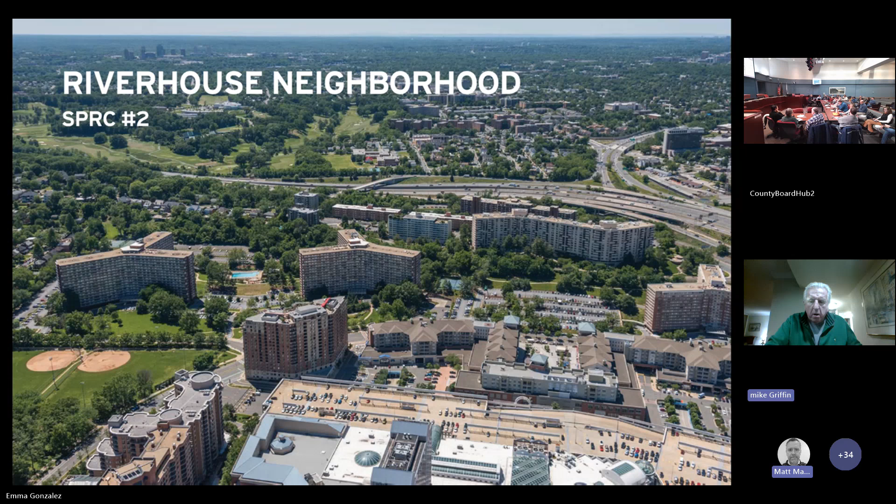Tonight, we're here to present our updated proposal for the RiverHouse neighborhood, which is really a culmination of several years of work, which many of you have been a part of. But I also want to remind folks that we're far from the finish line and there's still a lot of work to go. With that, to present our updated proposal, I'll hand it off to Allie Reed of Torti Gallas Partners.

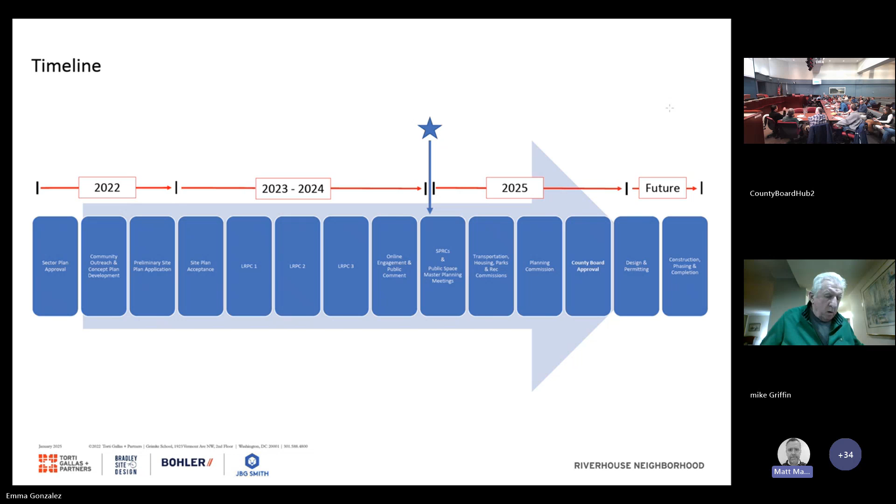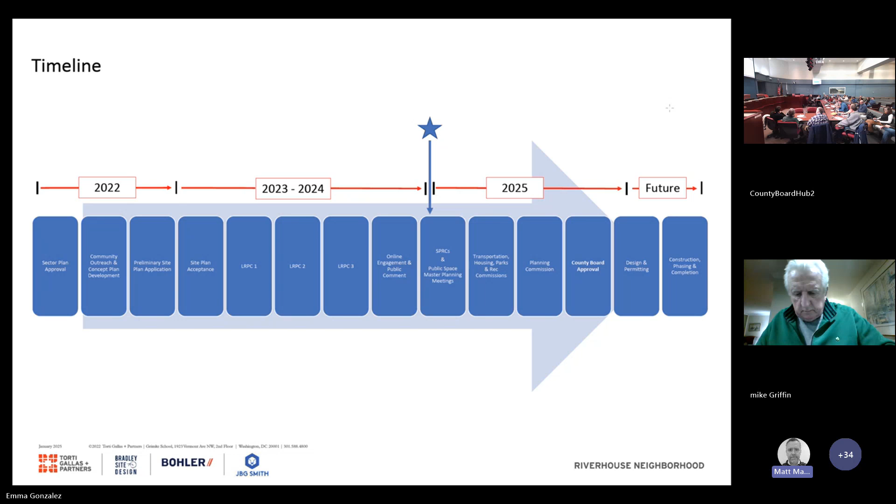Thanks, Gray. My name's Allie Reed, I'm an architect with Torti Gallas Partners.

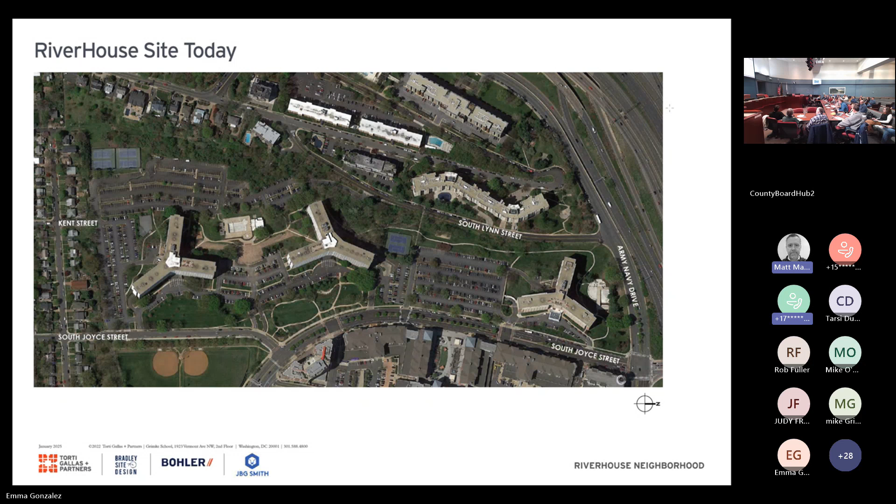So just to reorient us, the RiverHouse site today has the Ashley, the Potomac, and the James high-rise residential buildings. To the north of the site is Army Navy Drive, on the right side of your screen. On the left side to the south are the lower-height single-family neighborhoods. West Post is directly to the east at the bottom of your screen. We'd like to start today by taking a look back quickly at where we've been and what we've heard.

Back in 2023, the plan consisted of rental townhome fabric at the southern end of the site, mid-rise buildings C1, C2, and C3 in the central part of the neighborhood, mid-rise buildings N1 and N2, and to the far north, building F2, which is mid-rise, and building F3, which was high-rise. Between N1 and N2, a public open space directly across the road from the larger, more retail-centric Westpost Plaza, and of course, the green ribbon woven through the neighborhood at various scales.

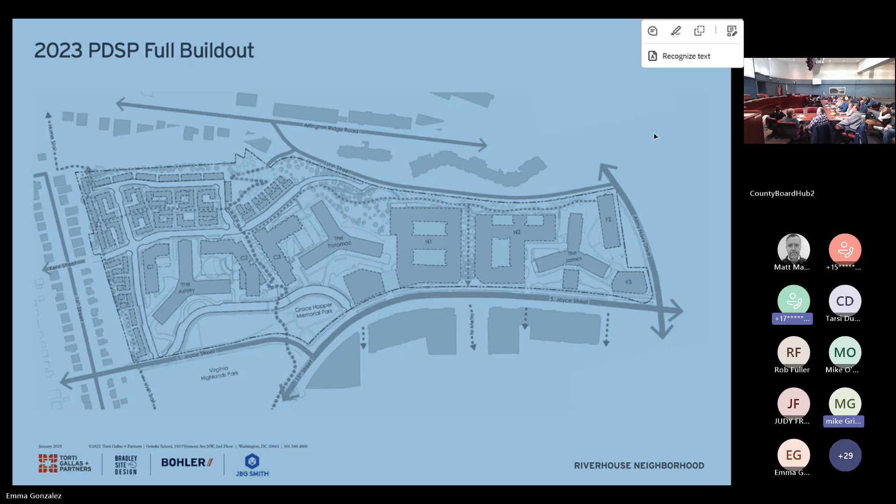Based on this plan, we received some feedback. I won't read through all of these because I'll go through them on the next slide, but big picture, changing building footprints and moving building footprints as well.

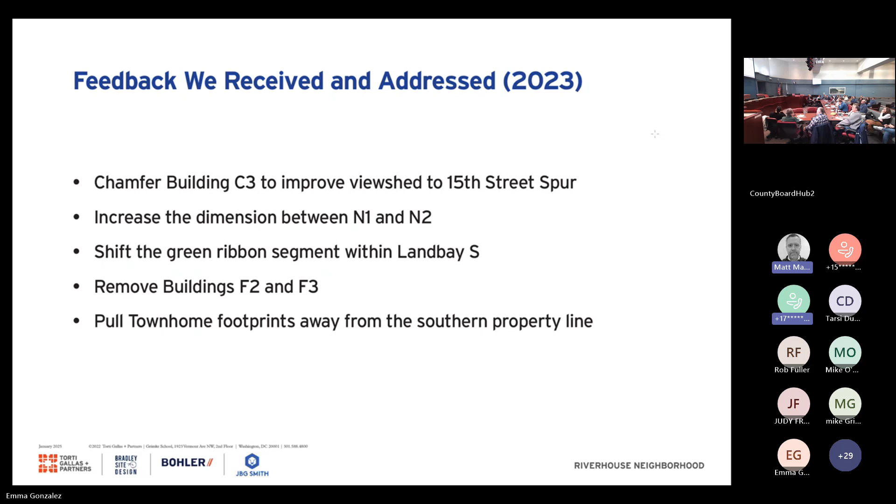So the team then worked with staff and made all of these changes. The plan evolved throughout 2024. We chamfered building C3 in order to improve the desired view shed between Virginia Highlands Park and the 15th Street spur, shifted the green ribbon segment within Landbay S east, and pulled all of the townhome footprints further away from the southern property line. We increased the distance between buildings N1 and N2 to 97 feet and removed all of the far north buildings. As part of this version, the rental townhomes were also changed to be for-sale townhomes, and with that change, a condo building was also incorporated. That's building O on this plan.

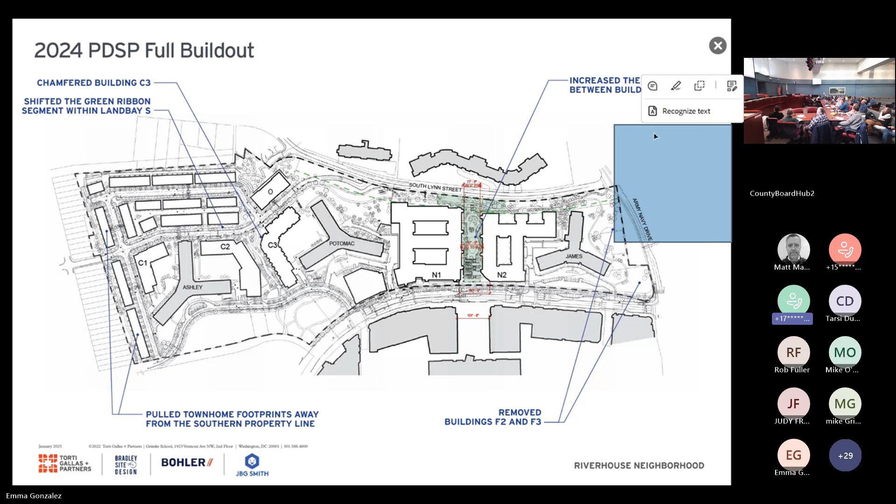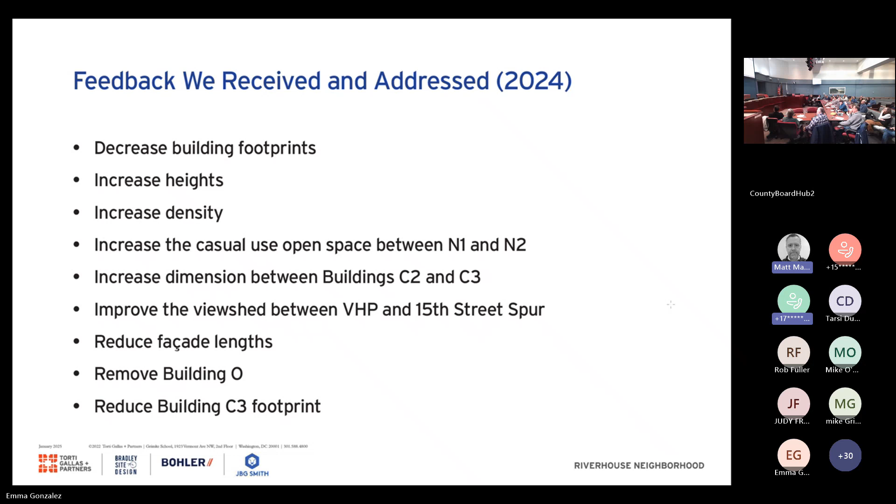At this stage, we received some more feedback. The larger points of that: decreasing building footprints, increasing heights and density. Again, I won't go through all of these, but we'll touch on them on the next slide.

This brings us to today. This is the currently proposed PDSP that the team is planning to submit. On the southern portion of the site, we have significantly opened up that view shed between Virginia Highlands Park and the 15th Street spur. The building O, that condo building, has been removed from the application. Building C3's footprint has been reduced significantly, and the distance between building C2 and C3 has been increased as well.

In adjusting that C3 footprint and removing the O building, the team was able to reevaluate the alignment of Kent Street. You can see that between the C2 building and the townhome footprints in this plan. This plan represents a slight realignment there, which allows us to preserve some of the existing RiverHouse amenities for RiverHouse residents in the interim condition. We'll see that in a phasing plan later in the presentation.

To the north, we also reduced the footprint of building N2, increasing the heights to 22 stories on the Joyce Street side and 12 stories on the Lynn Street side, allowing for a plaza or public open space that roughly matches the width of Westpost Plaza across the street. We also incorporated building N3, new to this proposal, a 22-story residential tower. For building N1, we actually removed the entire southeast wing of that building, overall reducing the size of that building and reducing facade lengths on Joyce Street.

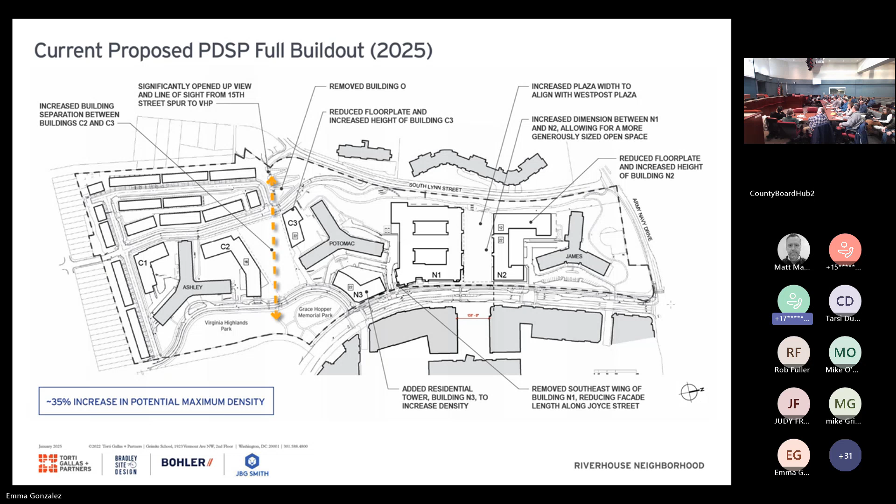This is the massing of the prior proposal, the 2024 version we saw a few slides ago. You can see the townhome footprints on the left of the screen creating that low-rise fabric on the southern end of the site, the mid-rise residential and mixed-use buildings filling out the rest of the neighborhood, as well as the green ribbon woven throughout.

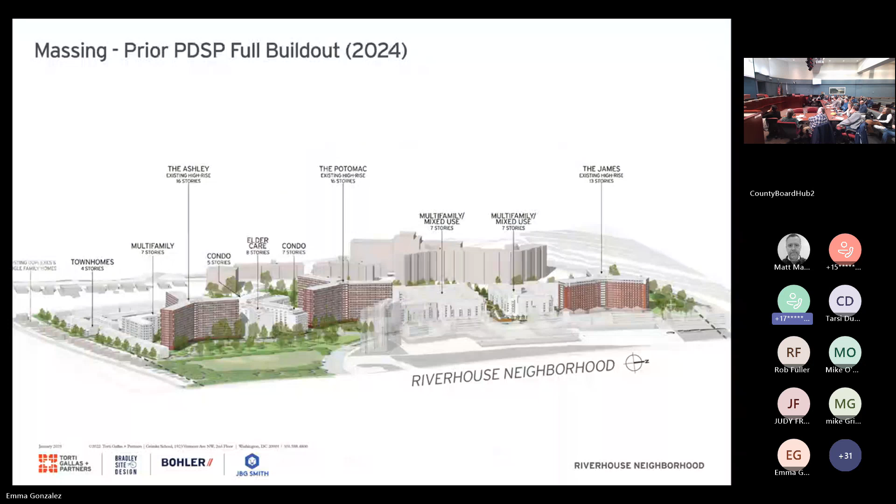In comparison, today's proposal actually includes greater space between buildings, so a larger building separation distance, generally smaller footprints, and increased density.

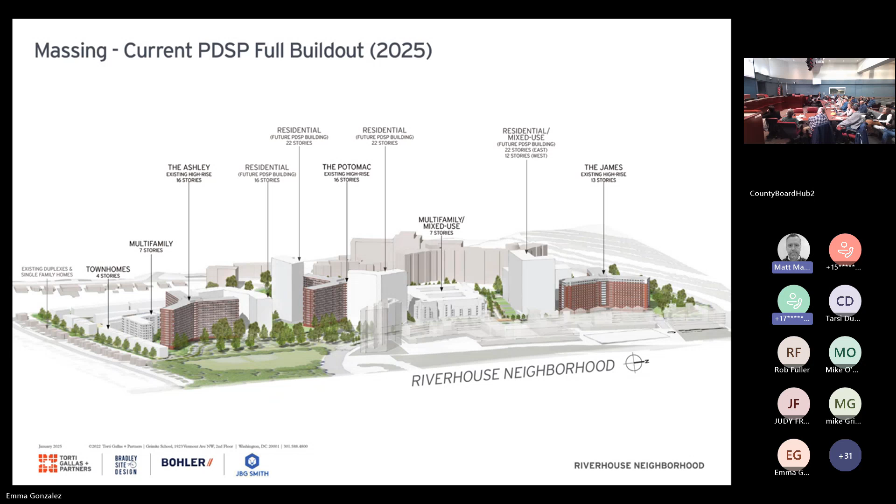With that, I'll hand it over to Belle with Bradley Site Design.

All right, thanks, Allie. I'm Belle St. John Day with Bradley Site Design, landscape architect for the project.

Much like Allie was describing the revisions the design team has made to the building massing, we've also been reviewing the green ribbon connections throughout the RiverHouse site to ensure we're creating a connected site throughout RiverHouse and into the larger community. So when we go to the next slide, this is the proposed full build out of the green ribbon on the site, with the remainder much the same as the last SPRC that everyone saw. The biggest revision is coming to that primary green ribbon from the 15th Street spur connecting to Virginia Highlands Park.

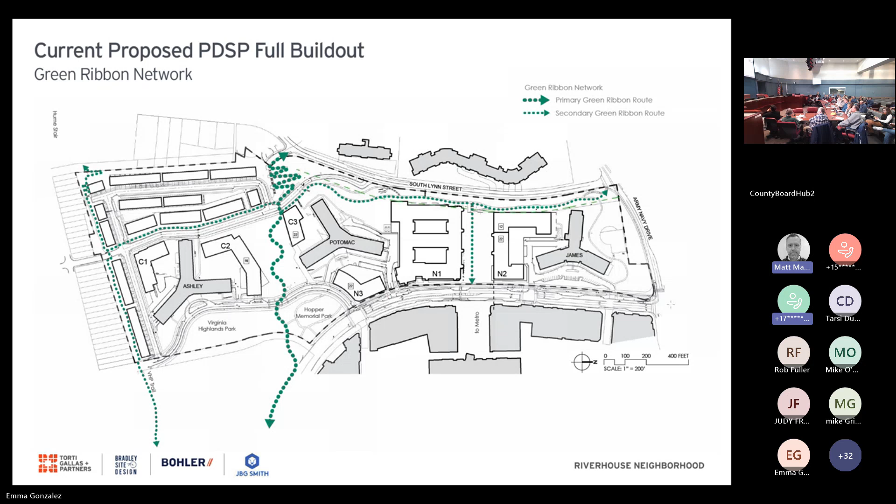So on the next slide, we zoom into that area, and what we heard an emphasis on was the line of sight from that prospect at the base of the 15th Street spur, between the Ashley and the Potomac, facing Virginia Highlands Park. We've highlighted that in yellow.

And then you can see we've placed that primary green ribbon within that view shed, understanding we still have 52 feet plus of elevation we have to navigate with this green ribbon. We want to be clear this won't be a straight shot to 15th Street spur.

It'll have to be a meandering, biophilic experience as laid out in the sector plan. Along with that, at the crossing of the primary green ribbon at Kent Street, with the realignment of Kent Street, we've been able to raise the elevation where we were most constrained, making that topographic change between the Kent Street connection and the 15th Street spur. With that raise in elevation, we're able to splay more of those ADA pathways and allow more canopy and vegetation area within that space.

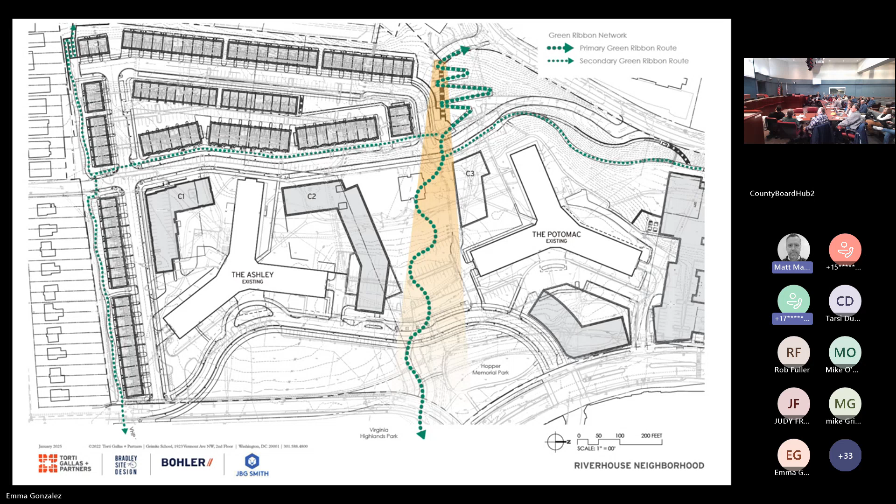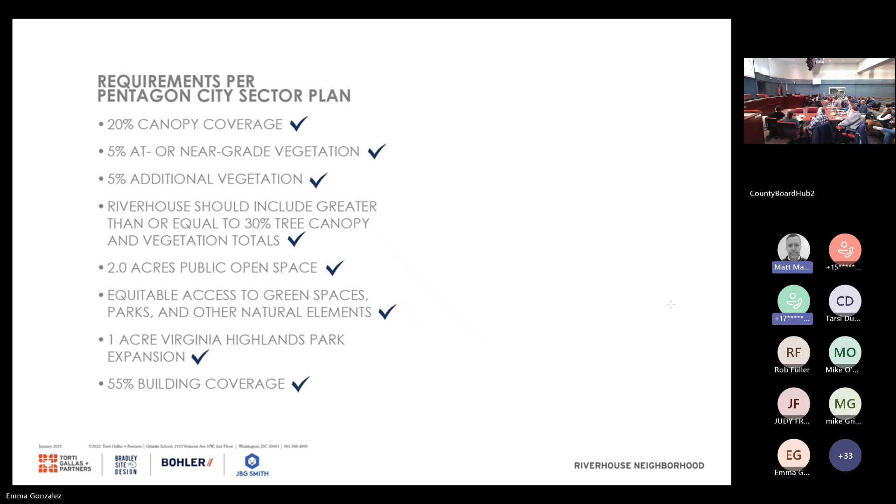That move of Kent Street allowed the shift of the C2 and C3 buildings. So the rest of the green ribbon, while it has to make up more grade change, we have more space to do so. The next slide emphasizes that with those shifts in the building and Kent Street alignment, we gain more space at the ground level to meet and exceed the vegetation requirement, especially the canopy coverage on the site.

So on the next slide, you'll see an overall plan of the site. Initially we had proposed final site plans for each element of the site in Land Bay S, Land Bay C, and Land Bay N, and we were going through a final design process for each of those buildings to be approved.

Now we are in a position where we are still going to get final site plans approved for the entirety of the site, but we are not going to be bringing forward all of the buildings within the PDSP at that final design level. So looking at this slide, you can see there are three areas that are not shaded: that's Land Bay S, building C1, and building N1.

These are the buildings that we plan to move forward with in the relative near term and to lock in the design for. So we're going to have final site plans with details for Land Bay S, building C1, and building N1. That leaves those shaded areas labeled existing, which encompass both the existing RiverHouse buildings and those future buildings that we do not see moving forward with in the short term, in the immediate term.

As we've said, there's a timing element here. Part of why we had these shorter buildings initially is we felt like those could be built in the short term. Now that has changed, and we can't necessarily do that with the proposed footprints, or build these in the short term. So we're not designing them to a final site plan level at this point.

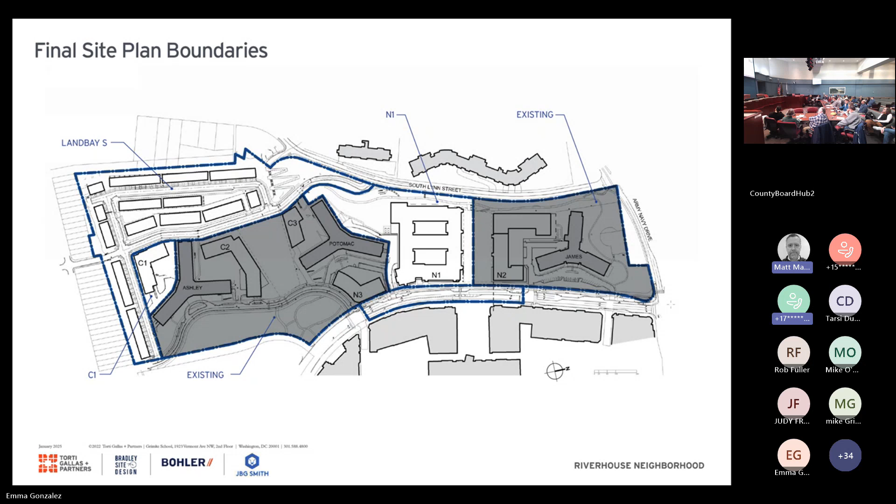So on the next slide, obviously, if we're moving forward with a portion of the site rather than the entirety of the site, we need to look at this in phases and how these different elements will be delivered and what will come with them. Land Bay S, C1, and N1 are the projects we see going forward in the relative short term, and Land Bay S is likely to go first.

We've shown here what's going to be provided along with these townhomes: we'll do the green ribbon in that section, Kent Street, and the affordable housing that goes along with it. We'll be submitting a final site plan with these details. That is not in yet, but it will be something this committee will review as we continue through this process. Obviously that also means there are going to be some interim conditions, and those are things we're going to have to discuss and talk through with this committee and with staff.

One of the important things to keep in mind with these interim conditions is that we have to make sure the existing RiverHouse buildings remain great places to live and that the amenities the residents use are still in play.

So one of the important elements of this interim condition is maintaining the location of the existing pool and fitness center. Those will ultimately be relocated in the final condition, but not in this short-term interim condition.

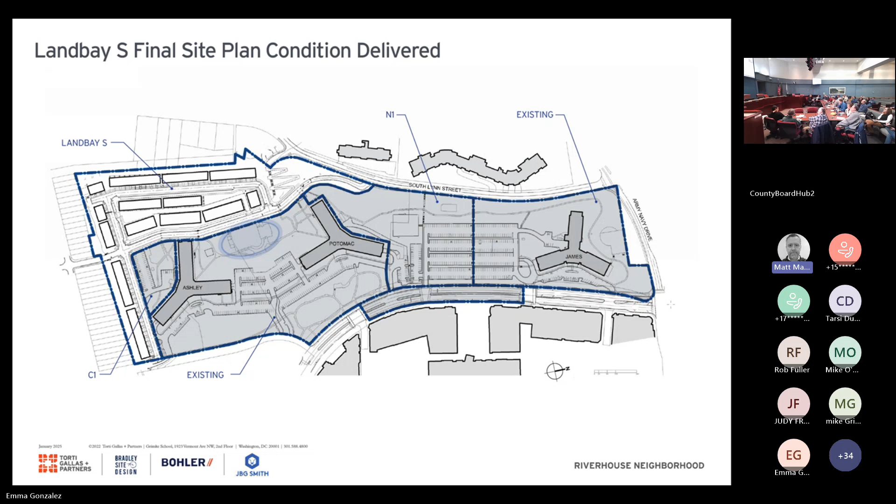The relevant portions of the green ribbon will be provided, as well as the accompanying roadway improvements along Joyce Street. There is also the portion of the open space adjacent to N1 up to the parking lot that's existing today, and we will provide those interim conditions as well.

Just to remind you, those areas that are shaded and labeled as existing will encompass the existing RiverHouse buildings and the future buildings for which there will need to be future final site plans.

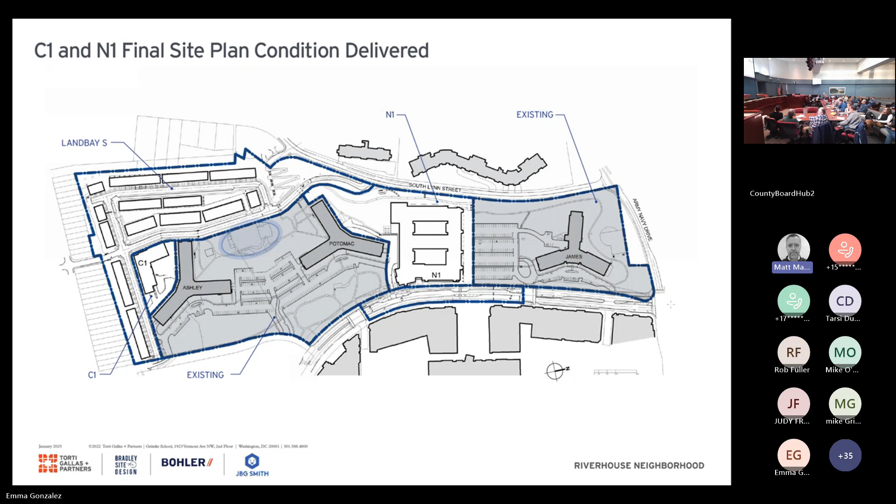On the next slide you can see the massing of what we anticipate that short-term build out to look like. Again, Land Bay S, C1, and N1 are the only buildings for which we are coming forward with specific final site plan designs at this point.

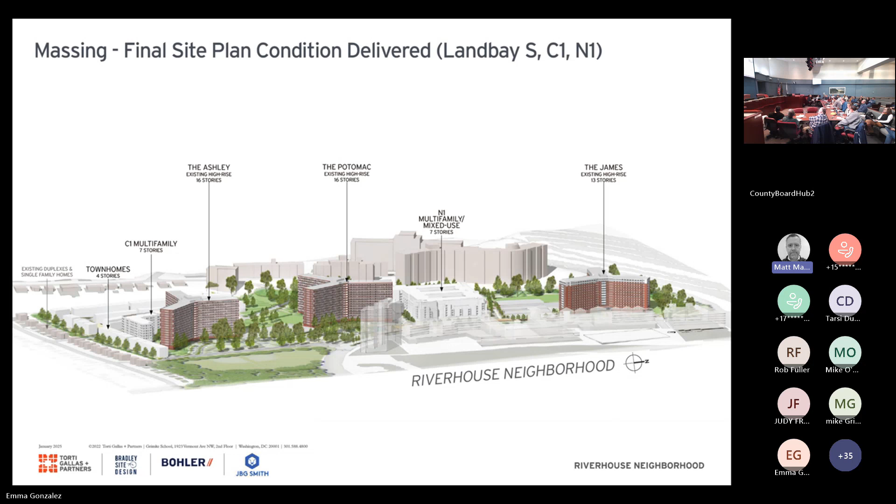So to summarize on the next slide, going over the things that Allie and Bell spoke about, what we have addressed and revised, both from the 2023 PDSP and LRPC discussion, and the 2024 final site plan discussion, that brings us to where we are today.

With that, I'll close and we'll be available to answer any questions you may have. Thank you. Mr. Watson.

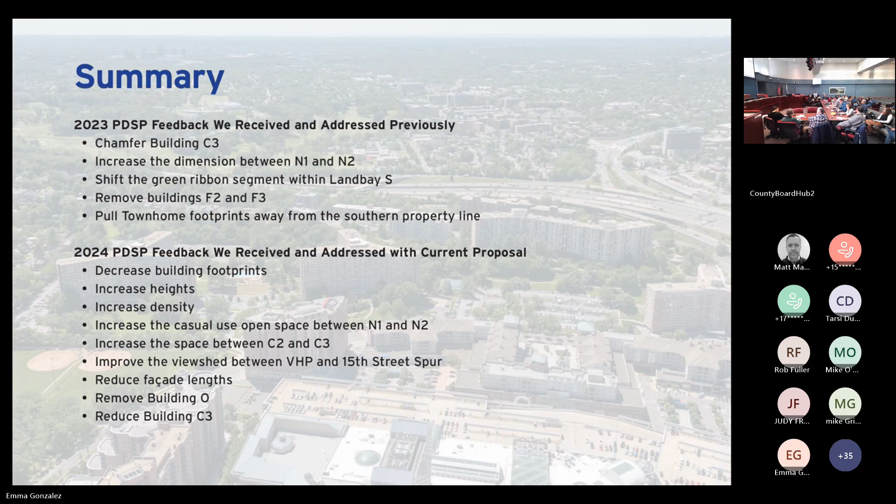Okay, thank you. Good evening, everybody. My name is Adam Watson with Arlington County Planning Division.

As the applicant just walked through, they made some pretty significant changes to this project in response to comments they got from the SPRC, from staff, and from the community. I just wanted to go over a couple of discussion objectives for us this evening for those on the committee here at the table.

The revisions we have are obviously at a conceptual level of detail only. We don't have a formal 4.1 plan submission yet. So the purpose of this meeting is really to focus on those conceptual changes, high level general changes, so the applicant can hear what everybody has to say before they formally resubmit those 4.1 plans to the county.

I think there are 4 areas in particular that we would hope to focus in on tonight, where the most changes were made: the density, the building placement and building heights, the public space sizes, shapes and locations, including the green ribbon, and then anybody's initial thoughts or questions about phasing and what each building might bring in terms of infrastructure and community benefits.

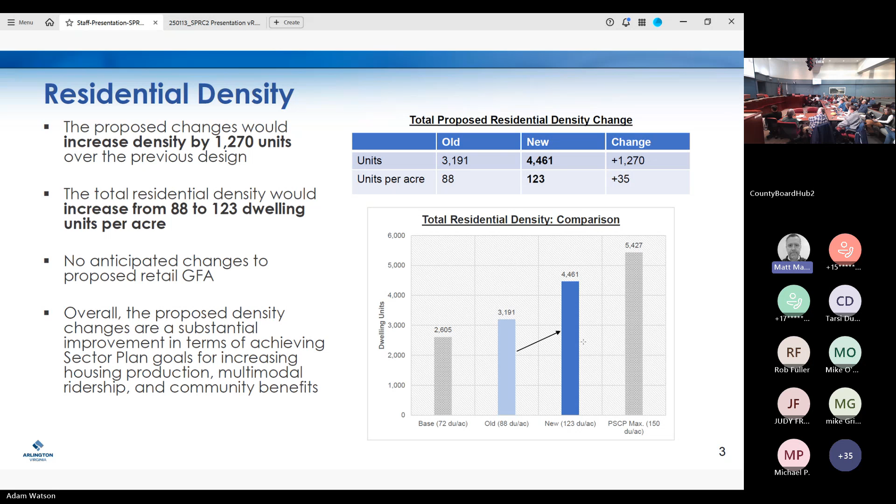From the county's perspective, this is a positive thing. The sector plan sets forth goals for having building height variation and for having taller buildings in specific locations, allowing for narrower footprints that enable larger and more generous public spaces. The issue we were running into last time was that the width of some of these building footprints was obstructing or diminishing what would otherwise be public open space.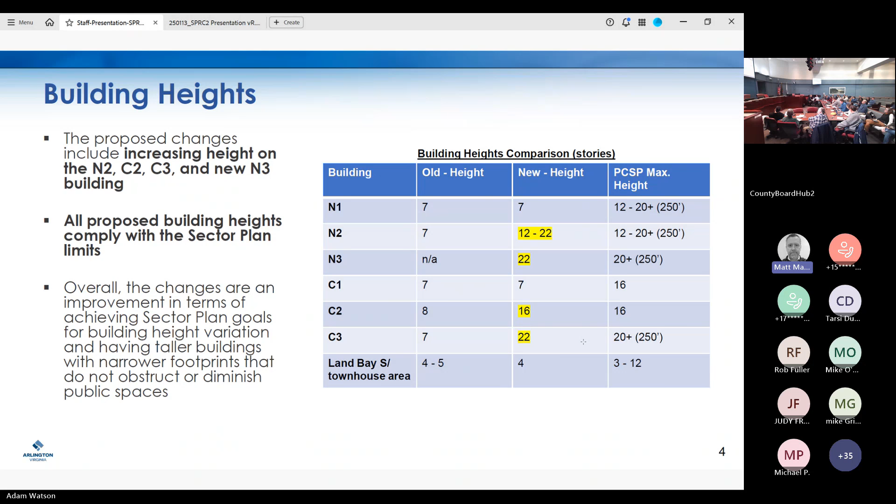I'm going to walk through a couple of those spaces quickly now. This is probably hard to read for those in the room, so I can come back to this later if there are questions, but we're going to do a comparison of old versus new. I'll work from the north side of the site down to the south, so page right to page left, starting with the northern area.

The first major improvement is that you now have the N1 and N2 building corners on Joyce Street meeting those fixed build-to lines shown in the sector plan, which means you have a width of this future public space that mirrors West Post Plaza across the street. In addition, this space will now be a full acre public space.

That does not include counting into any of the green ribbon or forested area that's up against the western lot line of the site or up towards the north, which was again an issue that we raised previously.

Again, building heights on the N2 building would increase here. There's not a final site plan for this building to come forward in the near term, but in the future you'd have a sort of L-shaped 12-story wing, then stepping up to 22 stories as you move towards Joyce Street.

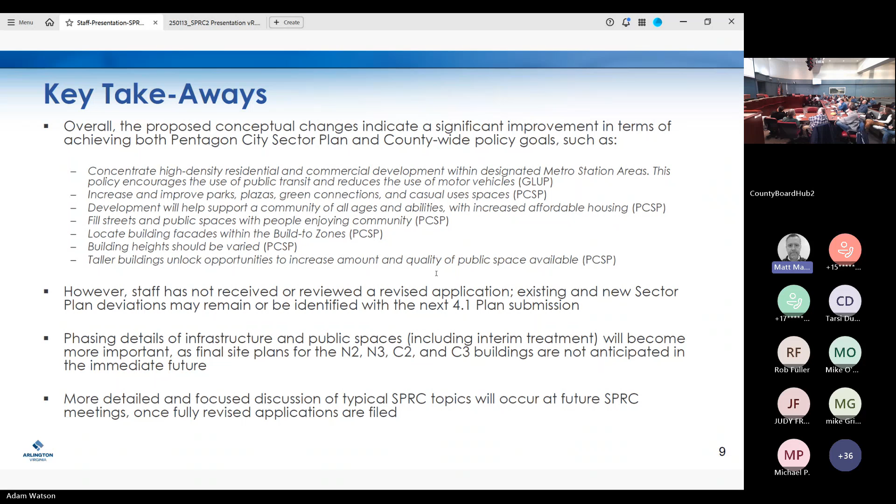That being said, we want to caveat one more time at closing that we don't have an application on file yet, so there may be new or existing deviations that we'll cover at future SPRC meetings.

We note, as Kedrick mentioned towards the end of the presentation, that phasing will become perhaps a more important topic of discussion for the SPRC, as we'll need to look through how infrastructure and public spaces are going to be delivered, not only in the final condition, but also with interim treatment.

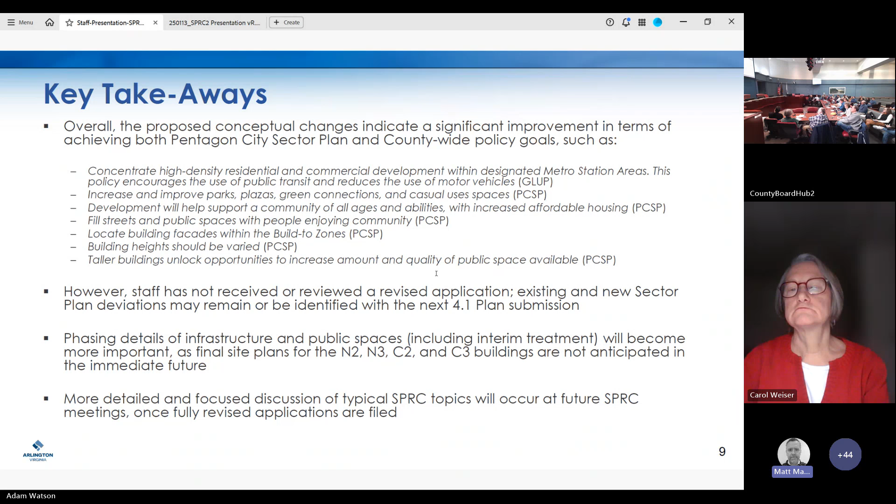Lastly, more detailed and focused discussion of those typical SPRC topics will occur at future meetings once we have an application for this revised concept, which leads into my last slide about our overall public review process and schedule.

We're meeting here, highlighted in green, on January 16 to go over these conceptual updates.

I don't know at this point how many more SPRC meetings we will need to have. We're going to have to talk with the chair and meet internally with staff. Once we get that application in, we'll have more to share with everybody in terms of exactly how many more meetings we're expecting and when those might occur.

I would also say that we are still expecting a separate but concurrent public space planning process to occur for designing the public space between N1 and N2, and also the future public space on the far north end of the site up against Army Navy Drive.

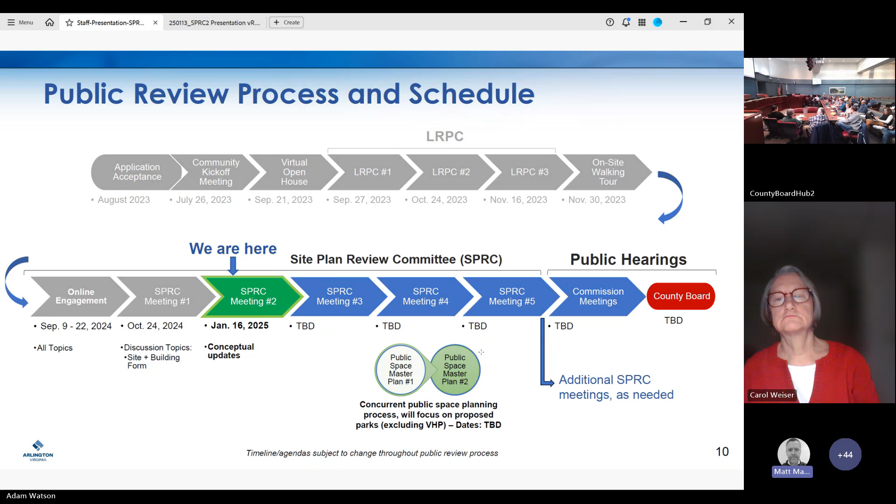And that concludes my presentation.

Thank you. Can I see, do we have the sign-up list in hand yet? Thank you, Mr. Gibson. We have 4. Okay, great. And do we have anyone online yet?

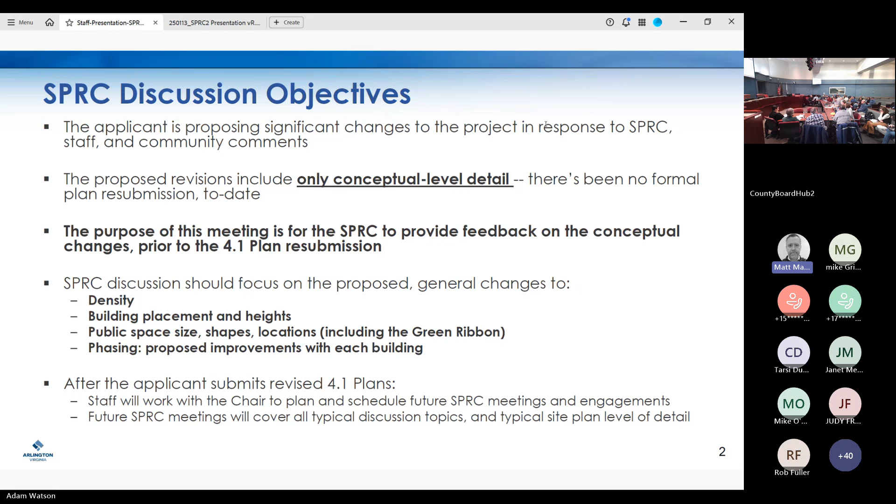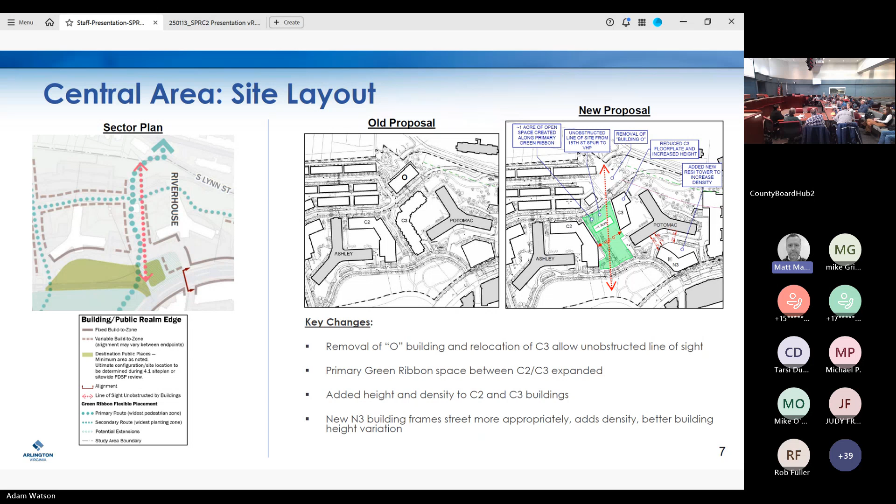Sure. So in our last proposal, where we now have building N3, there's actually a wing that jutted out further from the N1 building that was going to be a central amenity building. That was envisioned to both replace the existing amenity on site today, but also serve our future residents. And one of the things we heard is facade lengths were too long on N1.

To accomplish that, in conjunction with some of the density concerns, we replaced that with a high-rise building. Given that's a longer-term project, we wanted to make sure we can maintain amenity access for our residents today, and that road ran through the pool that's there today. So since that's going to be a later phase, we had to pull that back off the footprint to ensure access is maintained.

And as a result, given the grades, it made more sense to align the entrance to that alley between that central spine of townhomes slightly more north on site to ensure proper grades.

Commissioner Latomi — yeah, I'll pass, I have no further questions right now.

I want to stress one point I've had to remind myself of a couple of times — this is just procedural. This issue of a PDSP: two other PDSPs that people living near this site are familiar with are the Pentagon Center phase development site plan and the Met Park phase development site plan. In both of these, you have an overall plan that you approve, that's the PDSP, but there's also a site plan approved for each building or project that is part of that PDSP. So when I remember the parking garage at Costco was built, that had to go through its own site plan process subsequent to the adoption of the phase development site plan for the whole site.

So the question is, what is happening with the green ribbon when it reaches the base of the 15th Street spur and the connection up the rest of the way to Lynn Street? Correct.

So part of the coordination and ongoing coordination we still have with the county, but right now we are proposing a sidewalk connection along that edge, to be finalized when we submit that FSP.

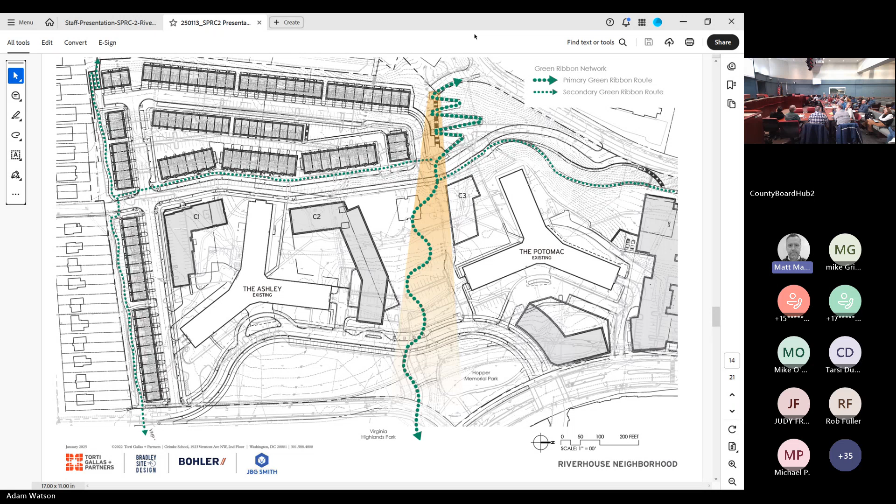I just want to say I'm really happy that we're getting these public open spaces, and very generous open spaces between the C buildings. That's going to allow the pedestrian and bicycle connections to not interfere with one another, and it's really a significant improvement from the prior submittal.

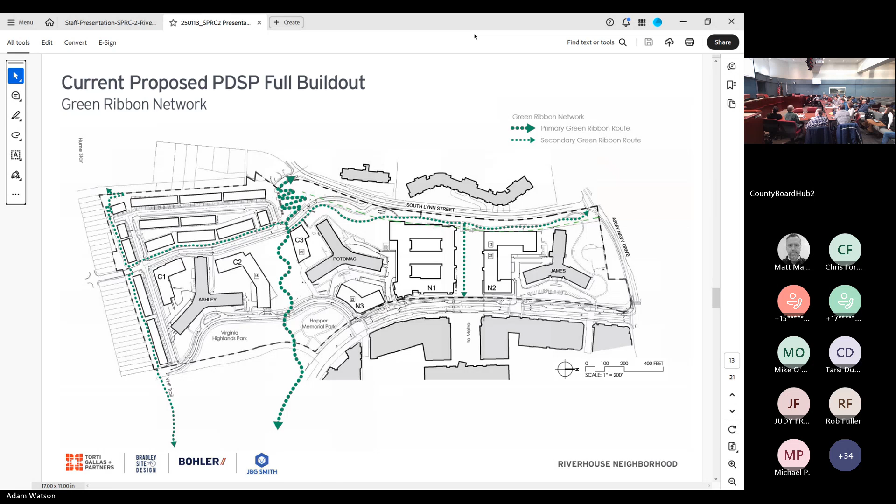Right, but for the three that are going forward, you're going to do concurrent SPRCs? One SPRC process for all. Okay, for all four of the projects.

And if you'll keep the process straight - the process that we're in right now will continue, and we will be looking at the final site plans for all the areas that are shown up there that are basically not shaded in gray. Exception being, we'll want to also consider what interim improvements and pedestrian connections might happen around those existing areas too.

Mr. Whitmore, did you want to? Yeah, I should just add too that there was a pretty significant reduction in the SPRC process, because initially there was going to be an SPRC for the final design of each of these buildings. And now it's the townhomes plus these other two.

I'm going to go back to Ms. Garcia, because it sounded like you didn't realize that I was asking for overall comments as well. Comments, yeah, yes, thank you. Thank you for hearing my confusion.

Yeah, thank you again. I do also agree with Jeffrey. I really appreciate the addition of open space. I know that's something we had all been talking about, and being important to the community. And so again, Arlington Ridge Civic Association, you've also heard, I know, from a lot of the condos up on the hill, obviously concerned about view sheds.

I think that as we move forward this will still be a concern, but alleviated in the near term since the shorter buildings will be built soon. I also know our residents on the southern edge are very concerned about not wanting that buildup of low to higher heights, so the townhouses, I think, hopefully achieve that.

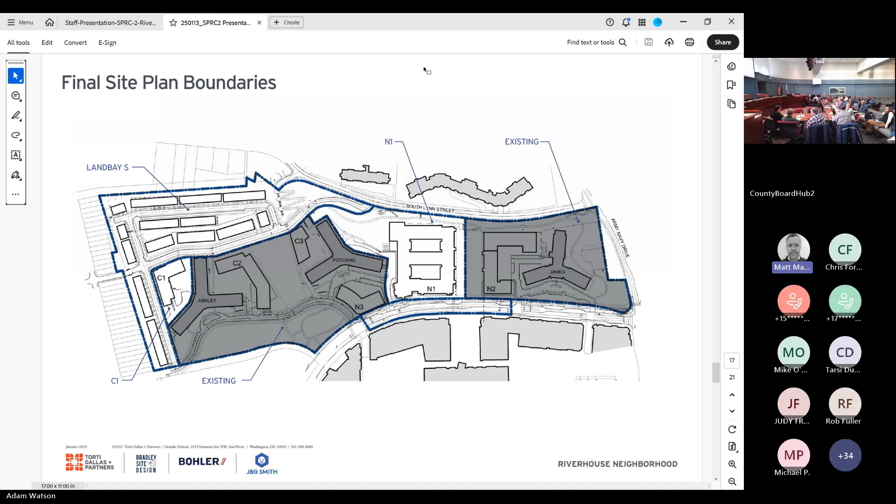I also appreciate the increase in density in that it will bring more benefits to the community. I like the higher heights in that it's going to provide more open space and green space in the surrounding areas between the buildings. Pleased to see that we will be getting more affordable housing, as well as that park space designed and brought to us early in the process.

I hope that the applicant will really lean into the green ribbon. I think there are ways you can do it that are uninspired, and ways you can do it where we could be an example for other communities about how we can really maximize green space in an otherwise very urban environment, which this will be. I'm also hoping that our interim conditions can have a lot of shrubbery and greenery to make the otherwise unpleasant construction feel a little bit softer.

Mr. Reb. So actually, I first had a question for the planning department. Are you still accepting questions? Yes. Okay, I would like to have us address the elephant in the room.

Which is this plan, unlike others, directly impacts iconic views of Washington, D.C. from Arlington Ridge. And since I represent 250 households that are impacted by that, I think it's important for us to talk about it.

Arlington County used to care about views. I own condos in a building in Rosslyn where the planning department required that it have a hole in it to preserve the views of the Potomac River from Arlington rent-controlled housing across the street. So a developer had to accommodate Arlington's demand that properties maintain their views, in that case of the Potomac River.